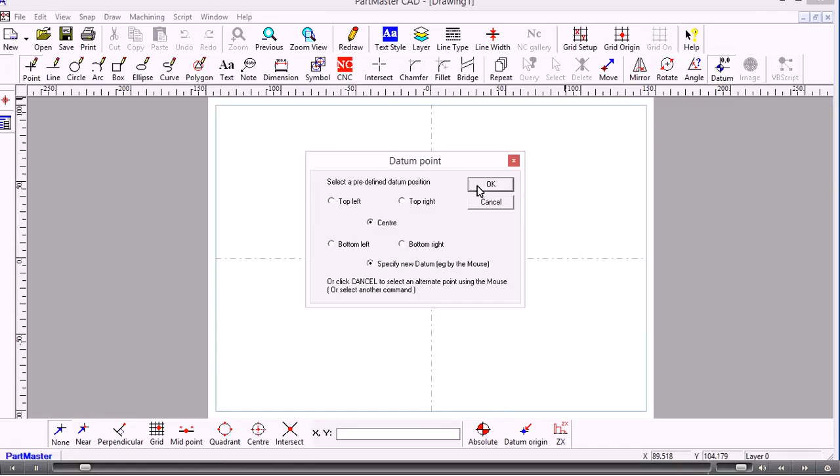From the CAD system, from the desktop, I've started the CAD system, so I'll start a new drawing. Okay, so this is the blank sheet of paper. If I need to, I can move the datum, especially if I'm working on quite a long part, I might want to move my datum to a different location. So that's just reset the datum, which is normally in the center of the piece of paper.

To set the units that you're working in, go to View, Properties. I'm working in millimeters. You could work in inches, but it's all the same.

So the first thing to do is to draw a couple of center lines on. To do that, I use Line, and then the second option down is Line at an angle. This is the line which is going to act as a center line, and I need to lock this line onto the datum point. I do that using the snap modes, which are at the bottom toolbar here, and I'm going to use near snap. So what that does is it snaps the line onto the nearest point that it can find to the cursor. On a blank drawing, the only point that it can find is the datum, so even if I move the cursor quite a ways away, it can only ever find the datum point. So I click to accept that.

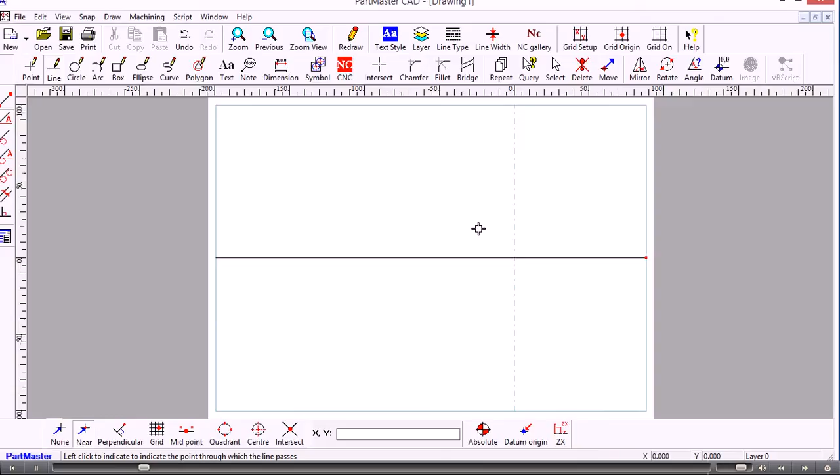Now I need to draw another line, so I stay in Line at angle and go to the Properties tab and set the angle to 90 degrees. Again, I'm staying in near snap mode, so the line will snap onto the datum position.

Having got those two lines there, I can now draw lines which are parallel to it. I'm still in line mode, which is okay, so I just go into parallel mode.

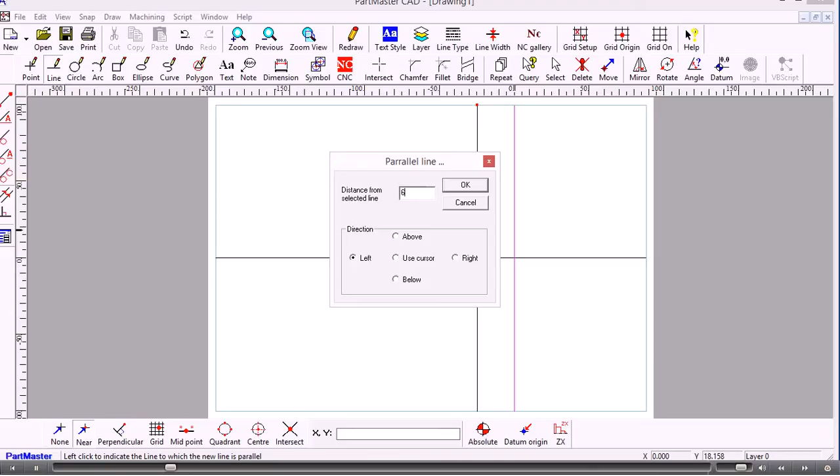So I'll just draw up a simple step shaft. We'll go 25mm to the left, 65mm to the left, and 100mm to the left. Those are the shoulders. That's the first shoulder, that's the second, and that's the end.

So now I'll use the horizontal line and go 10mm above, 15mm above, and 25mm above.

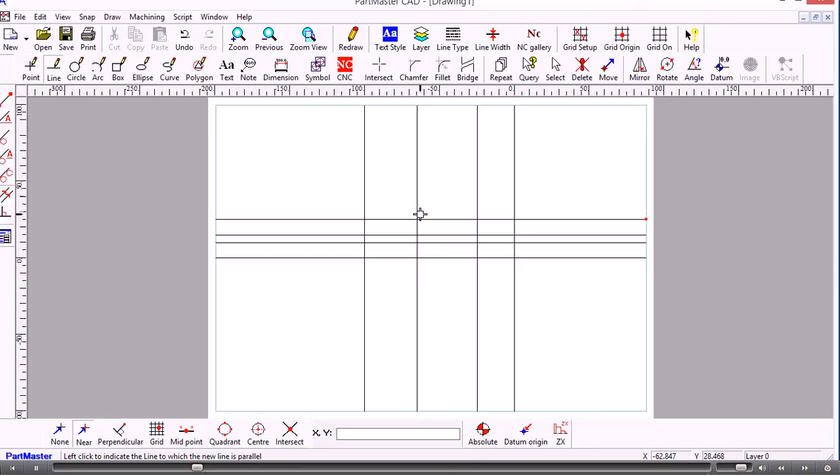Okay, so I'm just going to use the center mouse wheel to zoom in on there. So what we're going to have is that's the datum point there, come up, we'll have a little chamfer on the corner, put a little fillet in here, and so on.

So to do any of those operations, we use these icons here: Intersect, Chamfer, and Fillet. I'll start off using the Intersect command. What that does is it performs a function where lines intersect, or lines, arcs, or circles intersect. What it actually produces will depend on the option that you've taken from the vertical toolbar.

So create a node will create a node point, i.e. a point that you can subsequently lock onto. The second one down is to clip items. Third one down is clip first, so only the first item you choose will be clipped. This one here splits the items or breaks them apart at the intersection point, and this one here produces a split or a break point at the midpoint of the line. This option here is the auto function, which can be switched on or switched off.

So to start with, I'll switch it off and show you how we use the option clip items. Supposing we wanted a sharp corner here, where those two lines intersect each other, we'll be clipping them, which is a term we use for trimming or extending. The rule is that you always point to the part of the line you want to keep, not the part you want to get rid of. So looking at that entire line, where the intersection is, I want to keep the portion below the intersection. So long as I click somewhere here, that's identified the first line, and now the second line, at the intersection point, the portion I want to keep is over here, so I point there. That clips the lines at that intersection point.

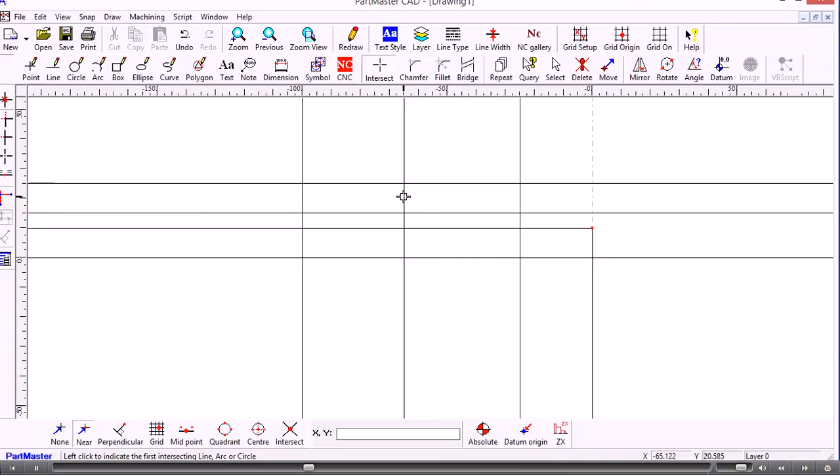And we'll use the similar function over here: first one, second one. Right, so that's shown you just simple clipping of the items.

If, however, I switch on the auto function and then move the cursor into the drawing area, what that does is it will automatically find any points that intersect and perform the clipping function on those two lines. In this case, the big blue rectangle is showing me the intersection point, and the two little tracers which move as I move the cursor are showing me the parts of the lines that will be kept after the clip operation is completed. So I simply move the cursor around until the tracers are on the two parts that I need to keep. This is just a single click operation rather than identifying the two lines.

Okay, so just to go back, that was using the auto function that you can switch on or off as you need to.

So in this position here, we'll put a fillet. We go to fillet, and from the options toolbar we choose the items that we want. The first one is to keep the items, so the fillet gets drawn but none of the lines which are tangential to it have anything happen to them - they stay as they are. Clip items will clip, i.e. trim or extend the lines as required. This works in exactly the same way as the intersection.

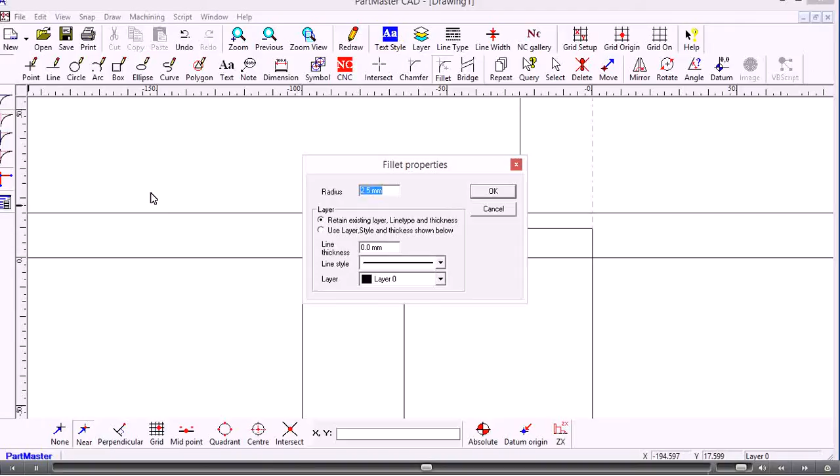Now if I increase the size of the radius, you'll be able to see this maybe a little bit clearer. Here you can see that the line or the arc is being extended as I move the cursor, so as I go over to this line here or back to this line here, it's showing me how the fillet will be drawn.

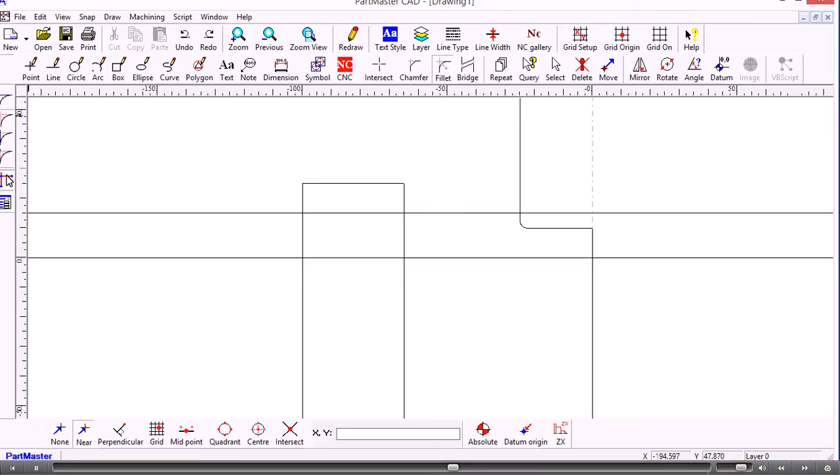Now if I just undo that, I'll show you the same thing, but this time switch on the auto function. With this, it's similar to the intersection - I simply move the cursor into the drawing area, and when it finds a position where it's able to fit the fillet, it shows me the fillet drawn, and it shows me those two tracers which are confirming that these are the parts of the lines that will be kept.

So that's that. Now I'll put a chamfer on this corner here. Chamfer works in exactly the same way as fillet, although it produces a chamfer rather than a fillet, but the option I want is to clip items, and the properties I want is the size of the chamfer.

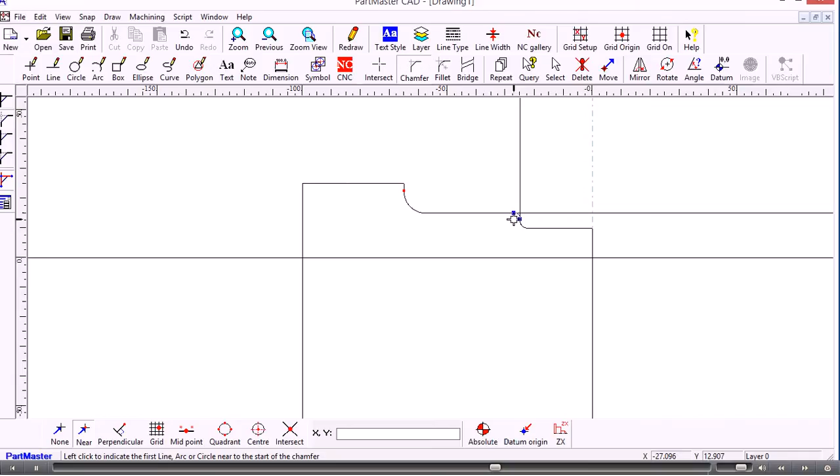In this case here, you can see how the auto function is switched on. Now if it's such that the chamfer is very small, you'll need to zoom in and then hold down the center mouse wheel and use that as a pan function, so that you're clear that you're choosing the correct position. But if you don't want to use the auto function, you switch it off and then you simply indicate the lines where you want the chamfer to appear.

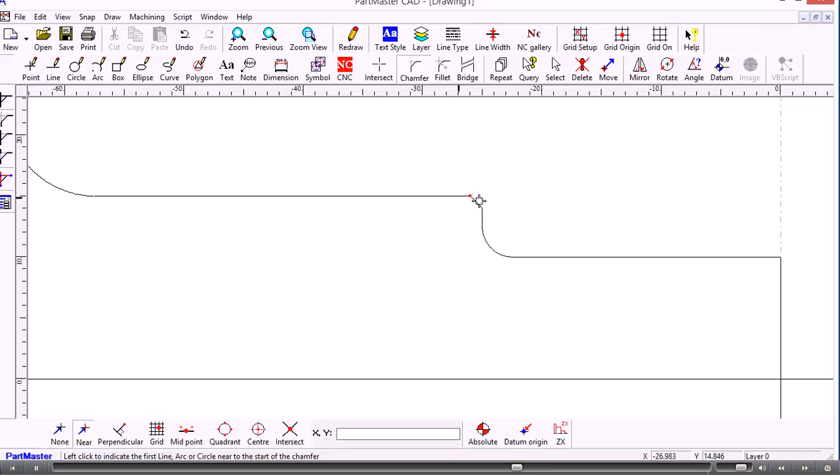So the same thing can apply here if we wanted to put a chamfer on there, and the same thing could apply if we want to put the chamfer on the back face there.

So the last thing to do here would be to trim these lines back to the center line. To do that, I can use Intersect, and I'm going to use the option Clip First. What this does is the auto function is not available because you have to choose the lines in the correct order - so looking at this line here and the horizontal one, that's the intersection point.

The segment of the line I want to keep is this one, so that's the one I click on, and that line will be trimmed to the center line. The same thing here, there to there.

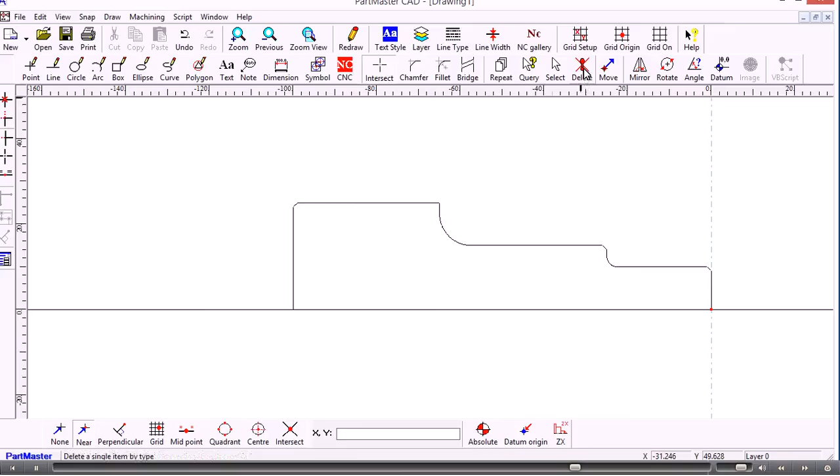Okay, so we've created the geometry. If you don't want to keep the center line on, you don't need to - it doesn't matter if you keep it or not, but if you do want to delete it, then you go to delete and then simply click the line. So that's produced the geometry.

The next stage is to create the profile, and then we'll take that through into machining. To create the profile, we use the big red NC button here. The first thing you need to notice is where the datum point is. Now the datum point for the geometry will be the default datum point for machining, but if you need to change your machining datum point, you use this icon here, and therefore you can reset the machining datum to somewhere other than the drawing datum, but in most cases the two will be the same. So that's just positioned the datum.

Now we need to create a profile. A profile is a series of linked line and arc segments that the machining software is able to follow. The first span I want to machine will be somewhere over here, so it would be unwise to create the profile going in the backward direction to the general direction that machining is taking place. So I click on the line there, and then the dialog box that is presented to me, I can leave all the defaults as they are there.

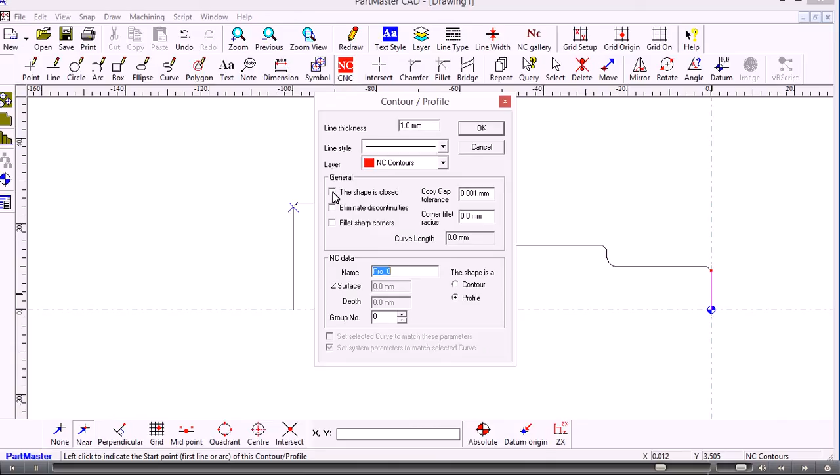One thing to bear in mind under the general tab here is that the shape is not closed, and because it's not closed, i.e. the start point is not the same as the end point, then I need to tell it where the end point is. So when I click OK, the system waits for me to indicate the end point.

If I'm not sure of what the system is expecting at any time, the bottom left here next to the word PartMaster, the help message will tell me what the system is expecting. In this case it says left click to indicate the end point of this contour or profile. As you can see, as I move the cursor around, it's locking on to any of the points that go to make up the geometry, and I want to choose this point here.

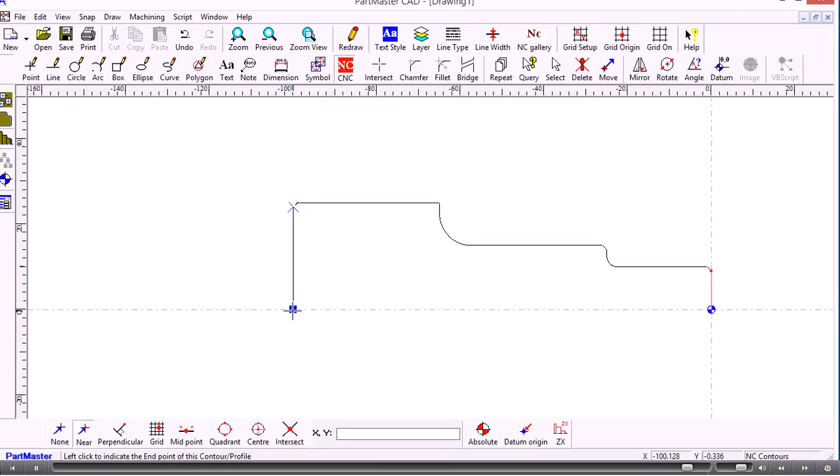Even though I may never machine that, it's better to choose that point there and have a profile which starts and ends on the center line. So that's created the geometry and then created the profile, and we'll come on to machining in the next video.